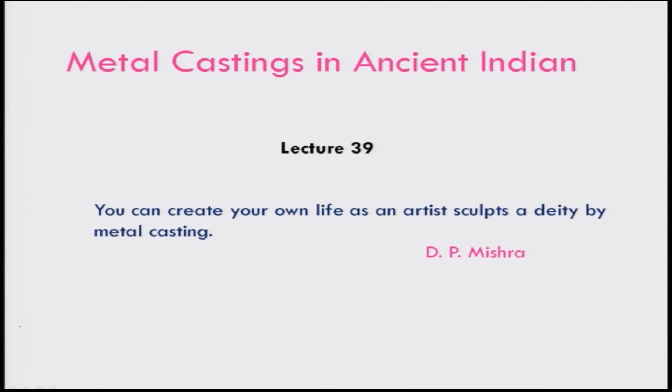Let me start this lecture with a thought process. You can create your own life as an artist sculpts a deity by metal casting. And today we will be basically discussing metal castings in ancient India.

A question might be coming into your mind: what do you mean by metal casting? Metal casting is basically a manufacturing process by which an object is made by pouring molten metal into a mold.

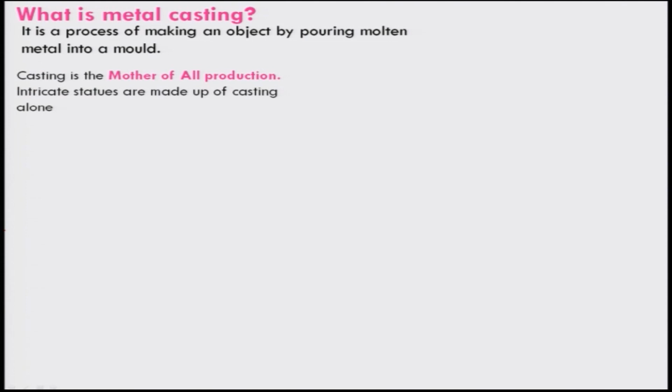Of course, casting is considered to be the mother of all production, and we know that intricate statues which are used as idols for worshipping purposes are made of casting alone.

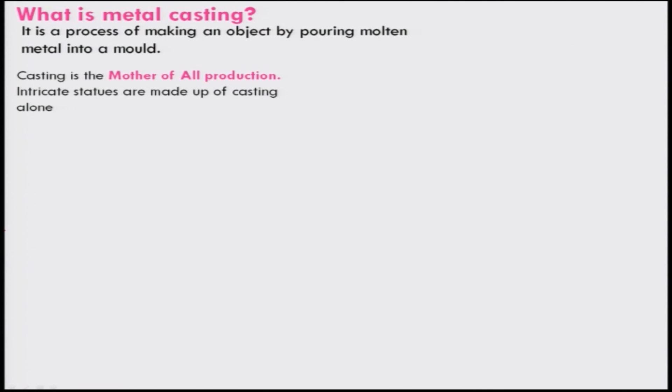So, in a simple way, one can say that casting has three processes: basically melt the metal and pour it into a mold and let it freeze.

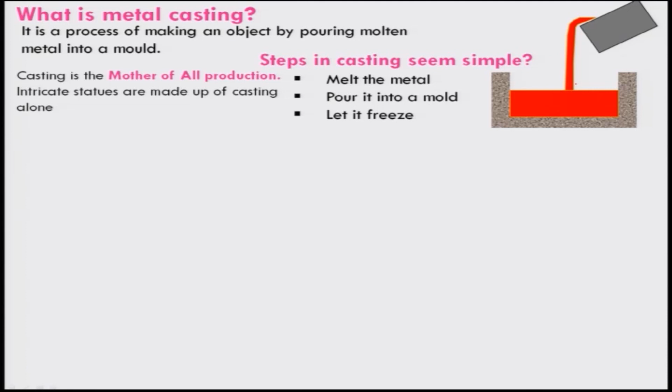Of course, it looks very simple, but it is not that. If you are not careful about making the proper mold, pouring it properly, and the solidification also should take place in a proper manner, otherwise a lot of faults will be there in the casting.

The casting methods are broadly divided into two categories: one is expendable mold casting, the other is non-expendable mold casting. Some examples of expendable mold casting are sand casting, plaster mold casting, investment casting, and others.

In case of plaster mold casting, plaster of Paris is used, but sand casting is quite old and was used in ancient times. We will be discussing more about investment casting, which was used in ancient India profusely for making statues.

The non-expendable mold castings are those in which the mold is used continuously. Some examples are die casting, continuous casting, and centrifuge casting.

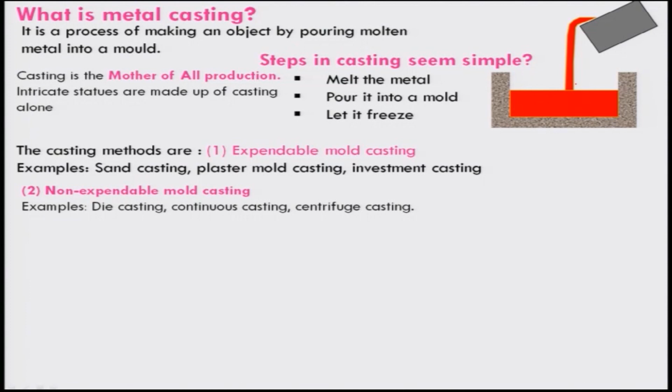And this casting is not related to only metal. It can be used for making glass, and even we use casting in concrete buildings for concrete slabs and other things. Keep in mind that some of these techniques also we will be discussing during the glass making process.

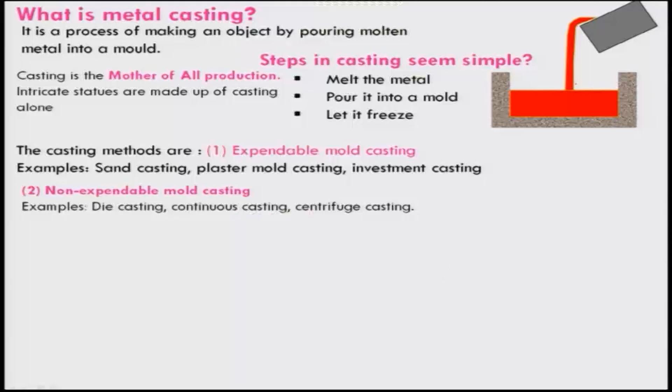So, this is the terminology we will be using, therefore I thought I will introduce it. Of course, there are more terminologies, and when you learn more about metal casting, you will be learning about it.

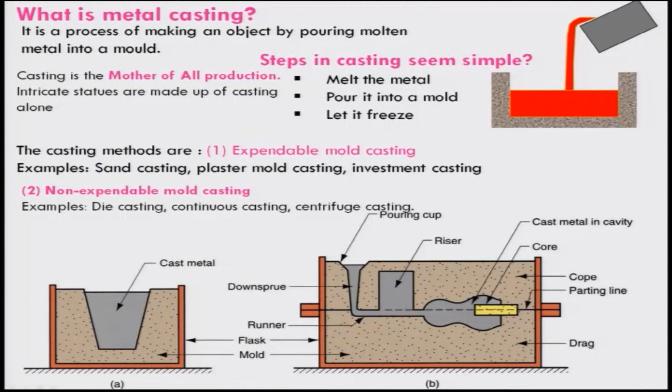How one can make this is a very important aspect that might be coming to your mind. So, this is basically made by casting, and it is considered to have been manufactured around 4000 BC, that means around 6000 years back.

And of course, the size looks too small if you look at today's world - it is around 11 centimeters high, a bronze dancing girl, made like this of bronze.

And besides this artifact, several kilns were identified at excavation sites in the Indus Valley civilization, Mohenjo-daro and Mehrgarh and other places, and also in other parts of the country later on, of course. These kilns are considered to have been used for smelting copper, silver, gold, lead and others

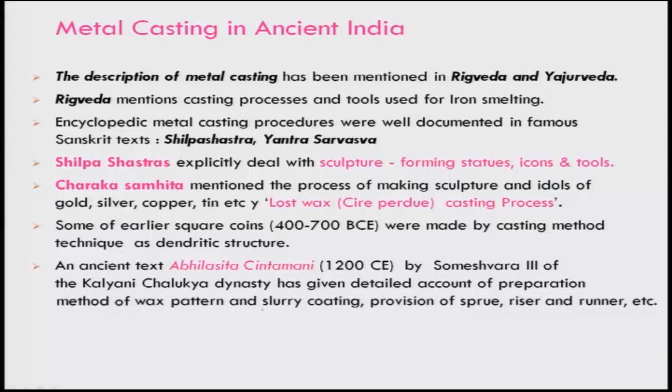If you look at the Shilpa Shastra, these are the tools being used. The Kupala, or in Sanskrit Dhamatri, is basically a furnace used to heat the metal for foundry work, and the crucible is the pot used for melting the metal; the crucible is also known as Gharma or Annamaya. And the blower, of course, is known as Bhastri. This is the air blower we have seen when we were discussing iron making.

So, therefore, it is a combination of technology and art which was being used for making the statues. That is a very important point you should keep in mind: do not segregate or separate the knowledge, rather combine it and make a product out of it.

they have not only studied it extensively, they have also made a model of this same amulet. They used wax for this model and a rod of circular diameter, made it into 6 pieces and then joined them with a ring. This model is created first, and after that they use some kind of clay and put it on, and then the mold is prepared out of this model.

And of course, as I told, this model is made of wax, which can be melted easily at a very low temperature as compared to the metal. So this can be heated so that the model can be melted out, and then the shape will be formed. After that you can pour the molten metal through this sprue, the metal will go through all the places, and then solidification will occur, and this is the piece they got.

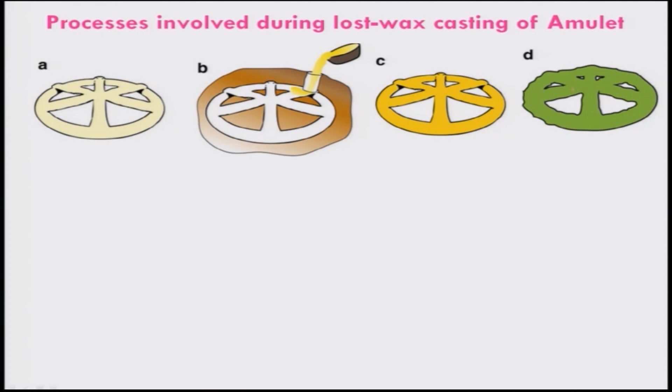Of course, after it solidifies completely, you will have to break this mold, and then you can get this metal cast amulet. And this is what they got, the rusted one we had seen. Now, they also looked at the casting from this process, took a smaller portion and investigated it using these modern imaging techniques.

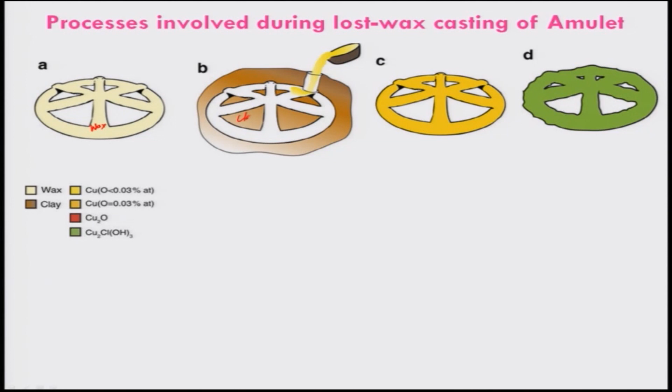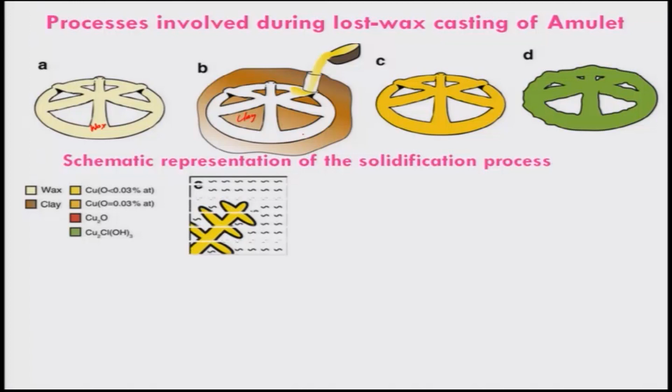And as I told earlier, this is basically wax, and this is the clay throughout. They looked at a small portion to find out what happens during the solidification process. They found dendrite structures when the temperature is between 1085 and 1066 degrees Celsius. There is dendrite growth of metallic copper, with oxygen maybe around 0.03%, and these will be starting there, and then subsequently what happened around

1066 degrees Celsius, cuprous oxide and copper eutectics are formed. As a result, the liquid phase solidified into oxygen-saturated copper and also copper and cuprous oxide rod-like structures. These are the rod-like structures which I have shown here. Subsequently, the final metal structure of dendrite copper crystals was formed throughout this domain, surrounded by

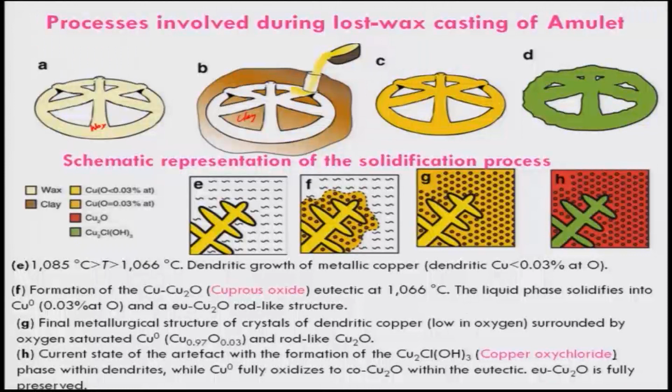oxygen-saturated copper. If you look, the red one is cuprous oxide, and the yellow one is basically the saturated copper. As a result, they get rod-like structures of cuprous oxide too, and finally that is what we see in the artifact, which is 6000 years old.

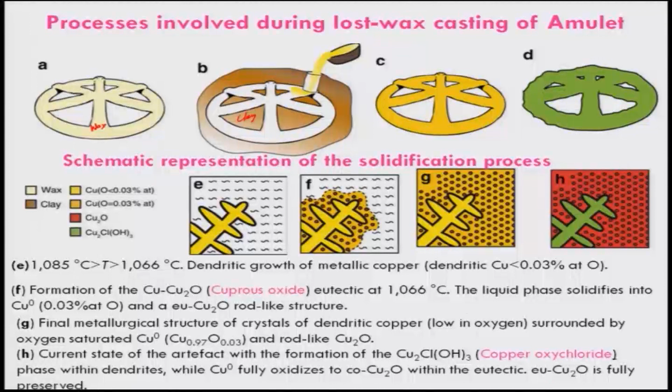They are finding a copper oxychloride phase within the dendrites, while the saturated copper fully oxidized to cuprous oxide within the eutectics, and they say as a result this eutectic cuprous oxide is preserved. They have also mentioned that this is the oldest artifact made by lost wax casting across the globe, and that means it was made in India basically.

And of course, there is a big gap in how the technique propagated from Sindh, from the Indus Valley civilization, toward the south and other parts of the country. But literary evidence suggests there was a revival of this technology; it might have migrated toward the south, and the metal casting art got started in South India around 600 to 900 CE under the Pallava dynasty, and it attained a peak during the early Chola dynasty, 900 to 1300 CE.

And of course, this thing was being propagated and also supported by the king at that time. As a result, there is a confluence of culture and abundant resources around the Tanjavur Kaveri Delta region, and it attained its peak in terms of technological development, combining art with science, as I was mentioning earlier. This is very much an amalgamation of both art and science together. And this is the region, the Tanjavur region, where it was being developed in earlier times.

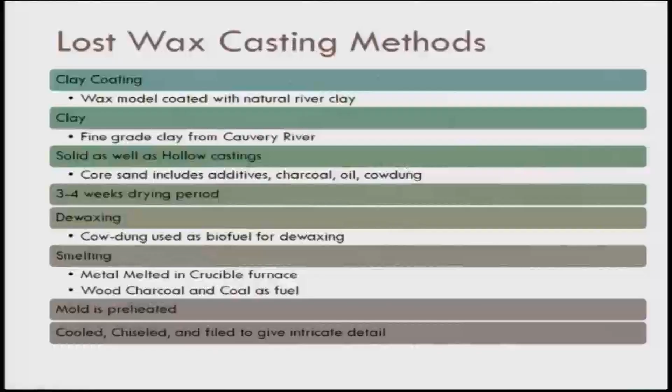So, let me show you a video which I have taken from the internet. Look, this is the wax, which is mixed with the material, and then you have to make this kind of shape, and the intricate wax is formed. And if you look, this is the statue, let us say Lord Vishnu, which he can prepare, and he can make a model like that, shown here with all the intricate shapes, and a lot of things have to be done.

And he is rolling this wax into some form, and look how he is using the hand and also a little small tool to make the hand and the fingers so nicely with mudra postures. And then you join them, and of course a lot of work has to be done on this, and this is the artistic work. Then the mold is prepared out of this, dried and placed properly, and some layer will be given and placed on this portion.

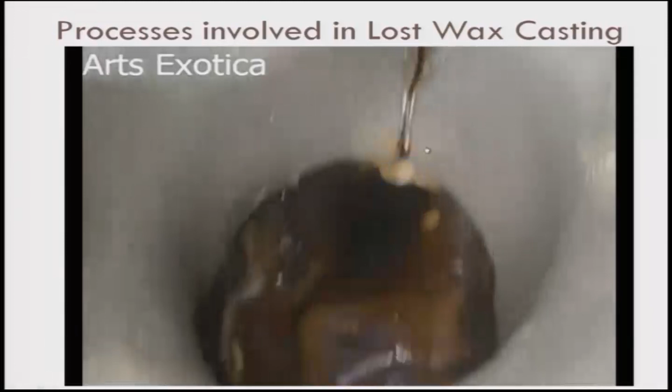And this is another one, a Nataraj statue coming up, and it has been fired, so the wax is drained out because of preheating, and the space is created for the melted metal to go in, and you get the statue of Lord Shiva as Nataraj, which is quite complicated. Out of just one casting he could manage to do it. This is another statue being shown. So, you can see the process. It looks very simple, but it is very intricate, complex and time consuming, and requires a lot of patience.

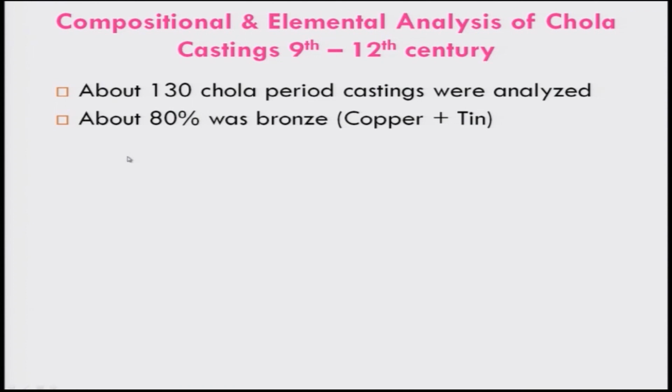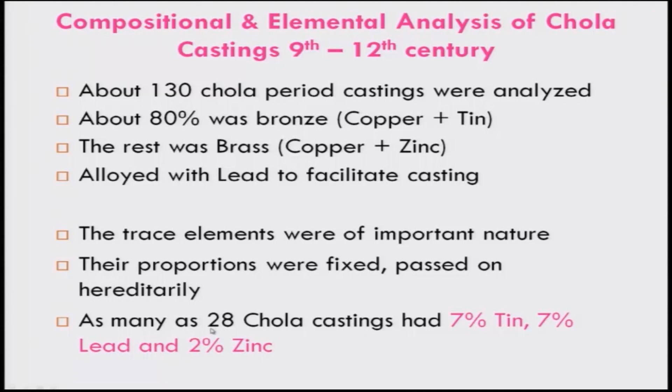A lot of research work has been done, but I will show you some of it, that is compositional elemental analysis of Chola castings. About 130 Chola castings were analyzed, and out of them 80% are bronze, that is copper and tin; the rest are brass, copper and zinc, and alloyed with lead to facilitate casting. Their proportions are fixed, passed from one generation to another, and kept as a secret. This technology is kept as a secret, and so is the material composition. As many as 28 Chola castings had 7% tin, 7% lead and 2% zinc.

Of course, rest will be covered. And this technology also flourished during the Vijayanagar dynasty, 13th to 14th century, and they had of course the lower tin composition, 2.5% tin and 3% lead. And this gradual transition of this method of producing statues took place from south to north India, passing through the Vijayanagaras, Nayakas, Marathas to northern India, as far as Nepal and Pakistan.

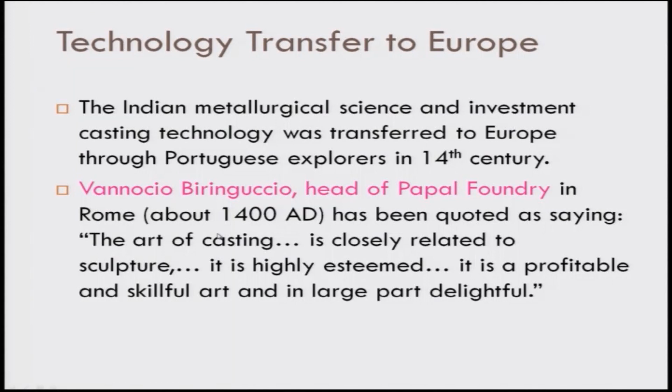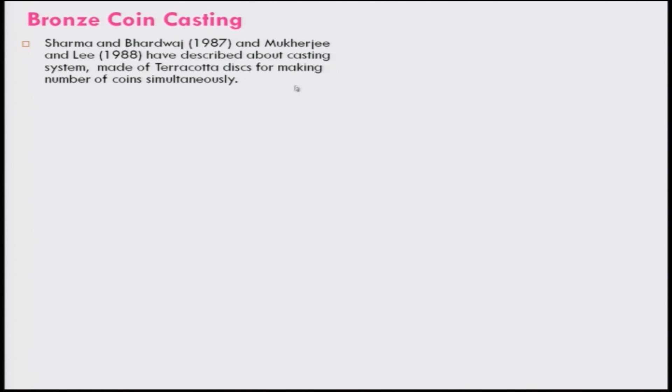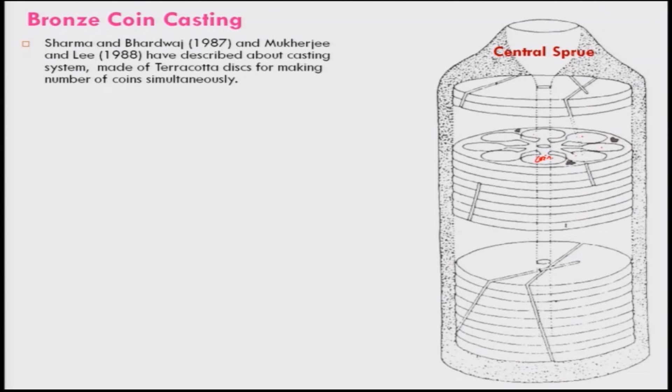Let me discuss another very interesting casting methodology which evolved in our country, particularly for making bronze coins in quantity at a time. Sharma and Bhardwaj, and later Mukherjee and Lee, have described this casting system made of terracotta discs for making a number of coins simultaneously, like mass production of coins. This is the mold assembly, and these are the coin molds. It has a central sprue here; the metal will be poured in and come through everywhere, and these are the small runners going to all these discs.

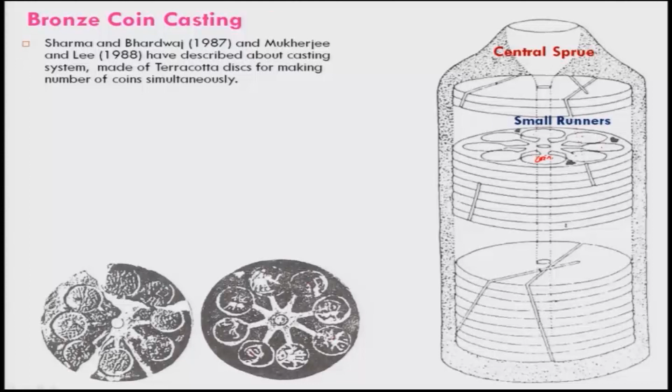So, if you look at this, 1, 2, 3, 4, 5, 6, 7, 8, you can get eight in one plate itself. It has a cope and drag; these discs are stacked to form a jhari type mold, one on top and the other at the bottom, and the stack is carefully packed from all sides. There will be several stacks, packed from all sides in a sand molding box.

This is your sand molding box, and the metal is poured as I told earlier through the central sprue, and molten metal enters into these places through the runners. When it is entering, it is important that some cavities, some air vents, be provided so that air from the cavity goes out, so that you get a very good casting without much problem.

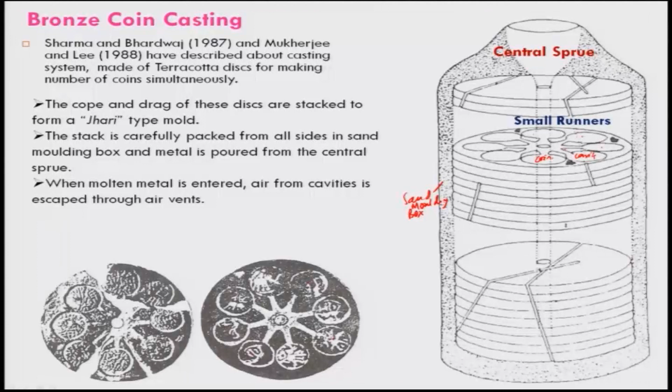So let me talk about another very interesting thing which I got just yesterday, that is the metal mirror craft of ancient India. The evidence says that flat circular tanged mirrors made of low-tin, around 10%, bronze metal were found in Quetta, the Harappan region, and Dholavira around 2000 BC.

This Ashtamangalam tradition is used not only in the south but even on the eastern side, and this tradition has continued from around 100 to 200 CE, as we have evidence from Jain votive tablets from the Kushan period, which included a mirror as part of the Ashtamangalam set.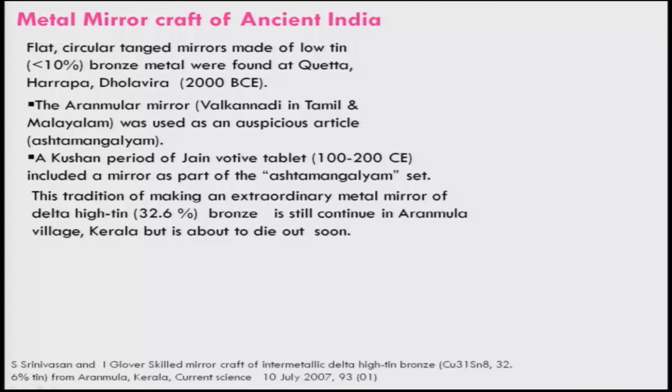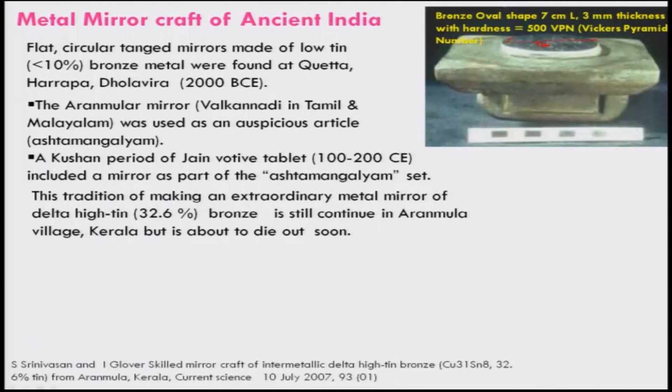I have shown you an oval shape bronze mirror about 7 centimeters long, with a thickness of 3 mm. It has a hardness of 500 VPN, that is Vickers Pyramid Number, which is much higher than steel. It has been described how they made it, but I will not be discussing that due to paucity of time.

They basically used a crucible-cum-mold. The mold is here and the upper portion is the crucible. They melt the metal here, pour it, and proceed. Interestingly, the cooling is done by clay cooling, which is fast cooling. They have to invert it after casting so that the maintained temperature stays around 540 to 350, so that the delta phase of this interesting alloy is maintained.

During the polishing process, the hardness also increases. So the delta phase, as I told earlier in this interesting alloy, is optimized by clever casting and polishing processes, such that it is converted into a silvery color, high hardness mirror. The melting temperature is around 750 degrees Celsius, but they have to maintain this temperature so that you get the hardness.

So the mirror is skillfully manufactured using low technology and organic, common materials to produce a sophisticated, high technology end product. That tradition has continued from 2000 BC to today, but it is about to die. It is not only this metal mirror, but a lot of products, because when I was a kid, I had seen in villages a lot of small scale industries going on.